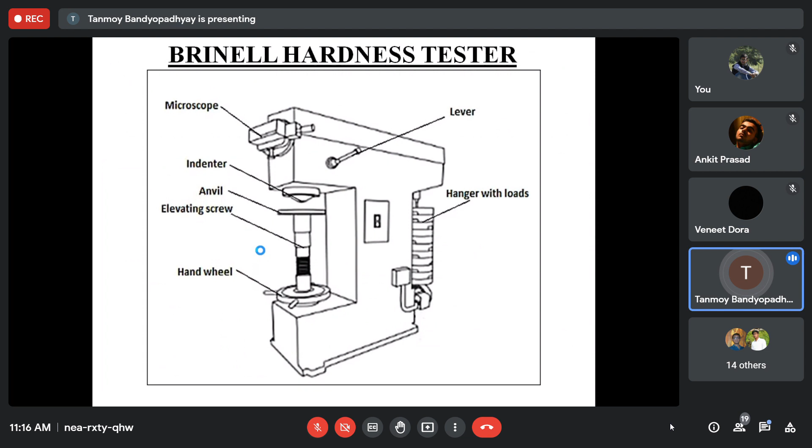এইখানে দেখো, সো এই যে ডেপথ অফ পেনিট্রেশন, এই ডেপথ অফ পেনিট্রেশনটা আমাকে বলা হয়নি, হোয়াট শুড বি দ্য ডেপথ অফ পেনিট্রেশন এন্ড অল, দ্যাট ওয়াজ নট গিভেন টু আস। সো ইন কেস অফ রকওয়েল হার্ডনেস, what we will be measuring is the depth of penetration, P.

So in case of Brinell hardness, we measured the diameter of indentation, and in case of Rockwell hardness, we will be measuring the depth of indentation. So in this case, the permanent depth of indentation is measured. So I had discussed in the last class that in case of hardness, the definition of hardness itself states that it is the plastic deformation, the resistance to plastic deformation. So only the permanent deformation or the plastic deformation that gets formed inside the material, that we have to measure.

So what is the suitability for Rockwell hardness testing? It's most accurate than other methods. Whatever are the methods of hardness testing like Brinell, Rockwell, Vickers, shore hardness, many hardness tests are there. So amongst all of them, this one is the most accurate and most widely used. It is very easy to perform, used for most metals except large surface variations. So it is useful for most of the metals that are available in engineering applications. It's used for relatively softer materials compared to the Brinell hardness test, which is used for harder materials.

So Brinell hardness test is mostly used for harder materials, or which are having like coarse shapes actually, coarse grains. So in that case, we'll be using the Brinell hardness test, and for comparatively softer materials having finer grain sizes, we will be using the Rockwell hardness testing.

So in Brinell hardness, we applied a single load actually, but in case of Rockwell hardness, we will be applying two loads. So initially we have to apply a minor load or a preload of 10 kg force on the test surface using a diamond or a ball indenter. So application of this minor load was not required during the case of Brinell hardness testing. Why? Because in case of Brinell hardness testing, we never measured the depth of indentation. So whenever you are actually measuring...

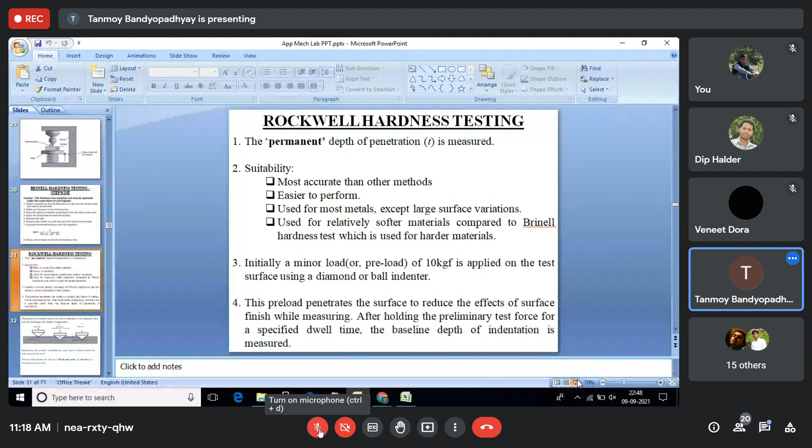So whenever we are measuring the depth of indentation on the surface, we have to consider one datum line. When measuring a depth or a height, you have to measure starting from some datum line.

So that datum line has to be considered. In order to create a datum line, we apply a minor load of 10 kgf, or a preload, on the surface of the specimen using a diamond or ball indenter. This preload penetrates the surface to reduce the effects of surface finish while measuring. After holding the preliminary test force for a specified dwell time, the baseline depth of indentation is measured.

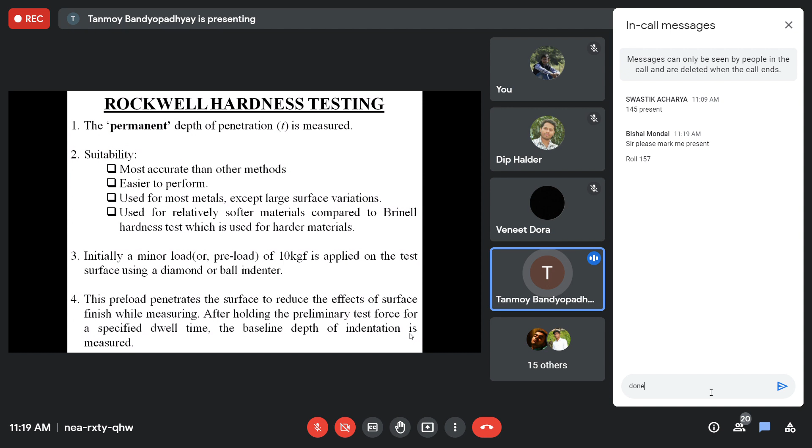So what we do is initially apply a minor load of a certain 10 kgf on the specimen so that it indents a certain height. This is the initial height. Let's call this indentation depth delta. After indenting by a depth of delta, I have to keep the load there for a certain amount of time.

Why? Because this delta will have two parts, an elastic part and a plastic part. I have to allow for a certain dwell time so that the elastic part recovers by itself and only the plastic part remains. Whatever plastic part remains, that depth forms the zero reference line from which I can continue the depth measurements on the surface.

Why am I doing this? Because any surface having rust and imperfections like surface coatings can undergo some surface preparation, but still, we apply a minor load of about 10 kgf, and whatever depth the indenter indents on the surface, we consider that as the zero reference line from which to start measurement.

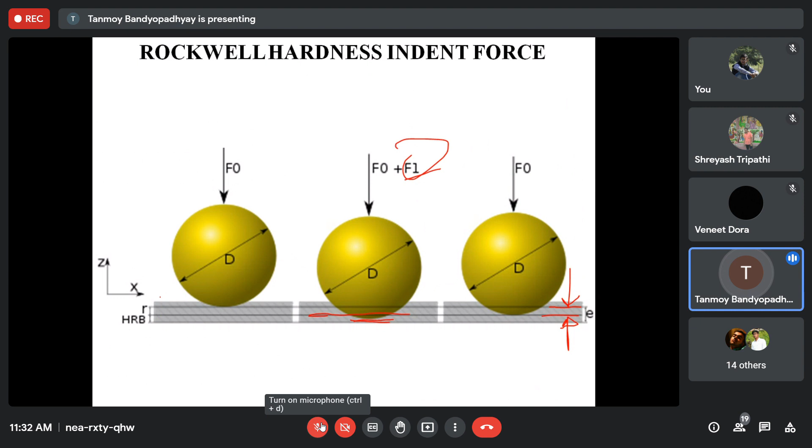What is the value of the major load? What is the value of the minor load? What is the purpose of applying the minor load? The minor load actually forms the datum surface, the initial datum surface, because in any case we cannot take the surface of the specimen as the datum surface, since there can be certain irregularities, there can be many things as I discussed. So what are the purposes of the minor load?

All these things are just important to understand - why we are measuring, what we are measuring, and how we are measuring.

So the last part is the testing precautions. Testing precautions are very important actually. It might look very easy or trivial, but actually testing precautions are very much important from the viewpoint of hardness measurements. This is applicable to both RHN as well as BHN.

Whenever you are measuring, in order to get a reliable value of the Rockwell hardness number, the thickness of the test piece should be at least 10 times the depth of indentation. Whenever you are indenting a surface, if the specimen itself is not rigid enough, like if it's a very thin specimen, then when you apply the load using the indenter, the specimen will start to bend, so the measurements won't be accurate or reliable.

So whatever is the thickness of the test piece that you are measuring, the thickness of the test piece should at least be 10 times the depth of indentation. So if this is the thickness of the test piece, whatever depth of indentation you are doing should be 1/10 of that. You cannot indent it up to, say, 50% of the surface and all.

So the readings should be taken from a flat perpendicular surface. Since you are measuring a depth, all the surfaces should be perpendicular. The load you are applying should be in entire perpendicularity with the top surface of the specimen, or with the axis of the specimen. The axis of the specimen should be in perpendicularity with the direction of application of the load. Unless that is the case, the deflection you are getting, the depth of indentation you are measuring, won't be a true vertical displacement.

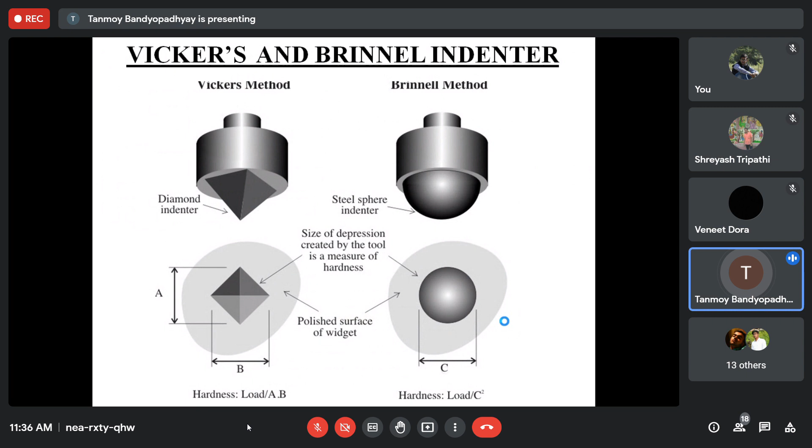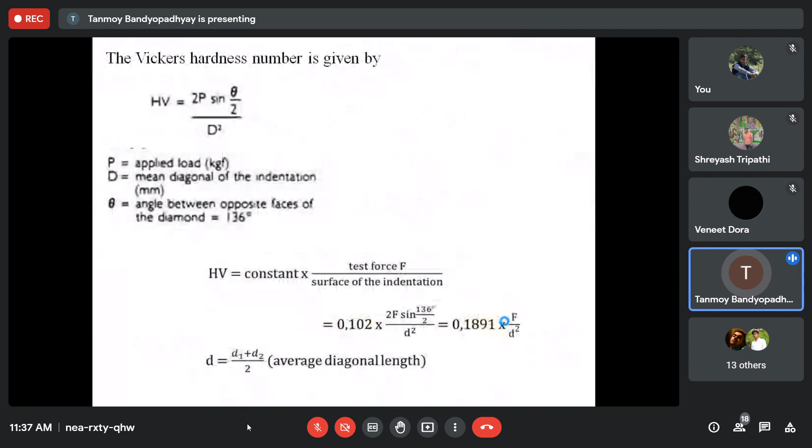What is the difference between a Brinell hardness test and a Rockwell hardness test? This is a very important point: number one, in Brinell hardness you are measuring the diameter, while in Rockwell hardness you are measuring the depth. Number two, Brinell hardness is applicable for harder materials and coarse grains, while Rockwell hardness is applicable for softer materials and finer grains.

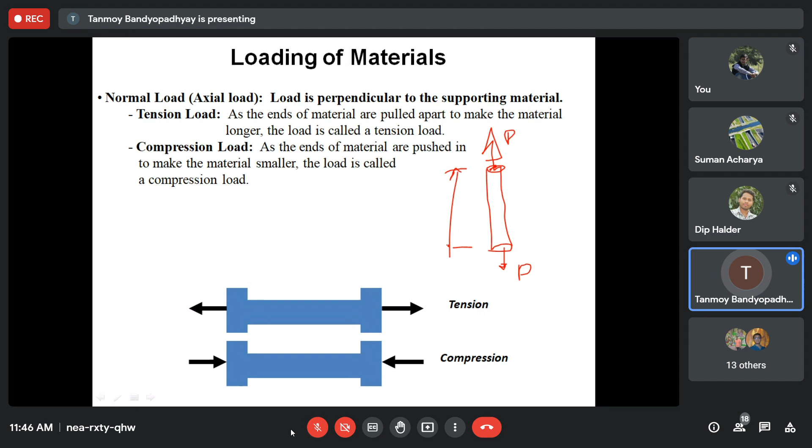Whenever we are doing tensile testing, the specimens are mostly cylindrical in shape. At both ends, we fix them to two jaws on a UTM machine, a universal testing machine, and then we pull the specimen using two equal and opposite loads. On the top part you are applying a load of P, and on the bottom part the same load of capital P. They must be equal, both on the top and bottom.

So let's see what happens. We are doing the tensile testing on a mild steel specimen. The shape of the specimen is sort of a cylindrical bar. A UTM is a machine, known as a universal testing machine.

Why is it called universal? Because many sort of experiments can be conducted on the universal testing machine. If you see in the lab, there are three basic tests. The first one is tensile testing, number two is compressive testing. Compressive testing is very useful for civil application tests.

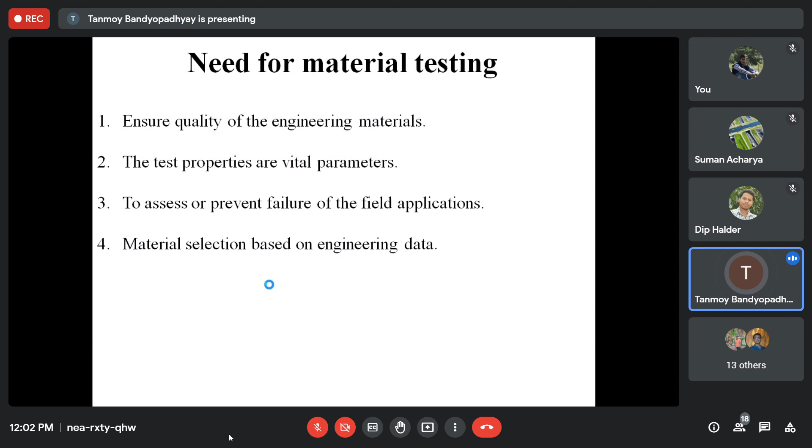আচ্ছা, এবার টেস্টিং যেটা হয়, so testing are of two types. One is known as destructive testing and another one is known as non-destructive testing.

So what is the destructive testing? Destructive testing মানে হচ্ছে suppose tensile testing. In tensile testing, we are loading the specimen, plotting the load deflection diagram, and at the end stage the specimen actually ruptures or breaks. Do you feel that the specimen after its testing is applicable or suitable for the engineering application? No, right, the specimen is ruptured.

It's a destructive case, so the specimen has been destroyed. It is not available for future application. So it's a destructive test, this tensile testing. So what we do is we take a specimen.

তো এখানে কি হয়, repeatability হতে পারে। Suppose I take 100 specimens and I test only one specimen. The properties that I get from that one specimen, say Young's modulus or shear modulus, all the other 100 specimens will be having properties exactly similar, if not exactly similar, within a certain tolerance limit. So if I test only one specimen, I can guarantee that all specimens in that lot or batch conform to the same standards. That is known as tolerance or standardization of the specimens.

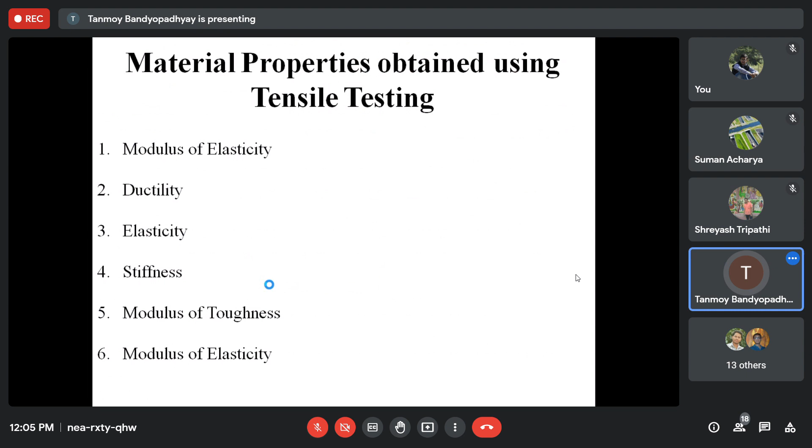আচ্ছা, what is a tensile tester? It is a tensile testing machine that we discussed. It's a machine which applies the tensile force to the specimen and measures that force and also the elongation. So in a tensile test, we have the arrangement so that a controlled and measured tensile force can be applied on the specimen, and the specimen also has arrangement so that force and elongation can be measured.

So after applying the force, you go on increasing the load, and in each step you measure the force and the deflection. In order to measure the deflection, you will have extensometers fitted on the specimen. Since the extensometer is fitted on the specimen itself, as the specimen elongates, the extensometer will also elongate by that amount. বুঝতে পেরেছো? এক্সটেন্সোমিটারের different principle আছে, but its job is that it is fitted to the specimen and measures the deflection that occurs in the specimen.

So finally we are measuring the force and the deflection on the specimen, and in most UTM machines you have a plotter, a pen and paper arrangement where we can directly get the F-delta curve. In modern machines, they have a computer interface. Whenever you are loading a specimen, the force and deflection are directly measured, the data passes on to the computer, and in the computer itself you can measure the load deflection diagram.

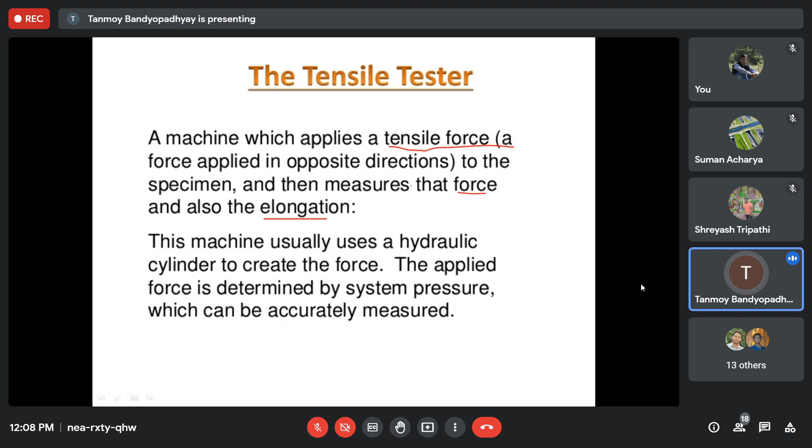The force we are applying, we are applying using a hydraulic arrangement. There is a hydraulic cylinder based on which the force is being applied. The applied force is determined by the system pressure, which is accurately measured. So this is a hydraulic UTM actually.

I don't know if you have seen UTM testing, like tensile testing and all. So this is the arrangement that we have. You can see that there are two jaws. This is the upper jaw and this is the lower jaw. In this part, the specimen will be fixed.

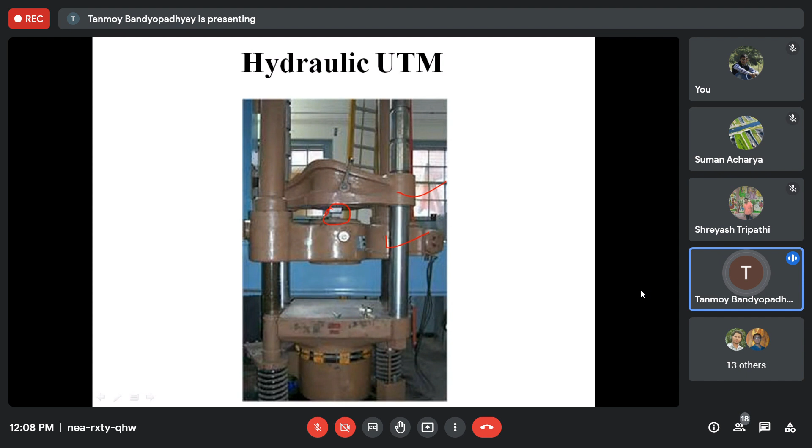As I mentioned, UTM operation can either be mechanical or hydraulic. Mechanical means it can be operated using a motor or a gear and all those things, and hydraulic means it's being operated using a fluid pressure. Either there is a single acting or a double acting piston to move the crosshead upward or downward to apply the load.

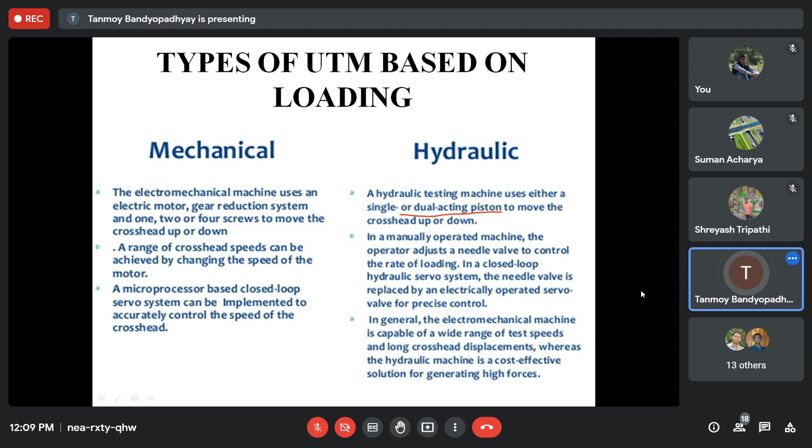This is the cup and cone fracture which I discussed, where the specimen is gripped in two jaws. So you have two jaws in the UTM machine. The specimen is fitted between the jaws and the load is applied on the specimen. One is a fixed jaw and another one is a movable jaw - both jaws don't move, one is fixed and the other is movable.

Whenever the load is applied, there is a deformation on the specimen. In order to measure the deflection on the specimen, as I had discussed, we use two extensometers - a left extensometer and a right extensometer. On the left side of the specimen we fix an extensometer, and on the right side we fix another extensometer. We get data on deflection or extension from both extensometers. We take the average of the left and right extensometer values and then get the actual deformation in the specimen, delta.

So up to this point I had discussed that whenever you go on increasing the load, a time will come when the specimen will neck. If you go on increasing the load, a time will come when visible bubbles or visible deformations will occur in the specimen. Then the bubbles will coalesce among themselves, and a time will come when the specimen will fracture completely, using a cup and cone fracture sort of thing.

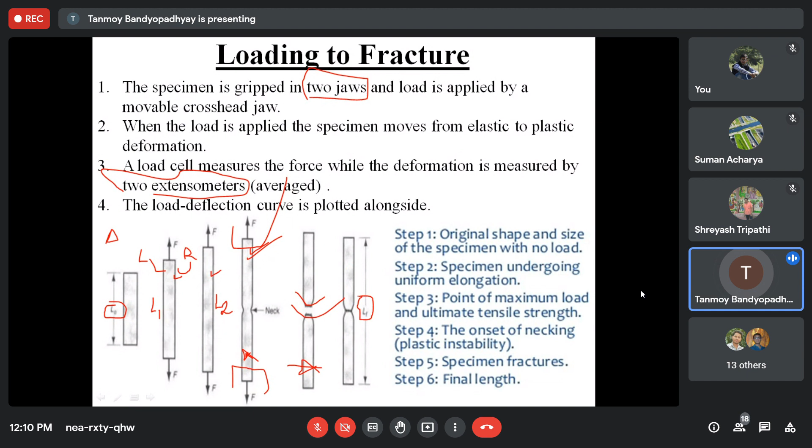So finally what we do is we measure the final length. We join the two pieces of the specimen together and measure the final length LF. From there we can calculate the strain epsilon as LF minus L0 divided by L0.

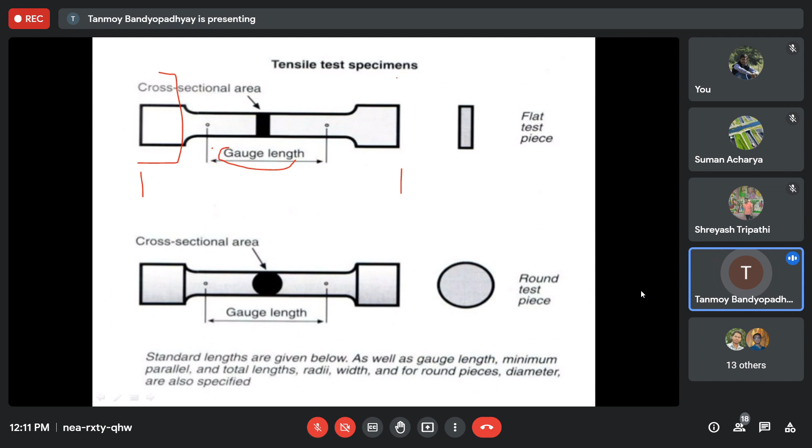This is about the flat test piece and round test piece. We have to take one gauge length. What is the gauge length? Gauge length is the length on which the actual measurement is being done. We don't take the total length into account, because two parts are for fitting in the jaws of the machine. That part actually goes inside the jaws, so on this gauge length part all the calculations are done.

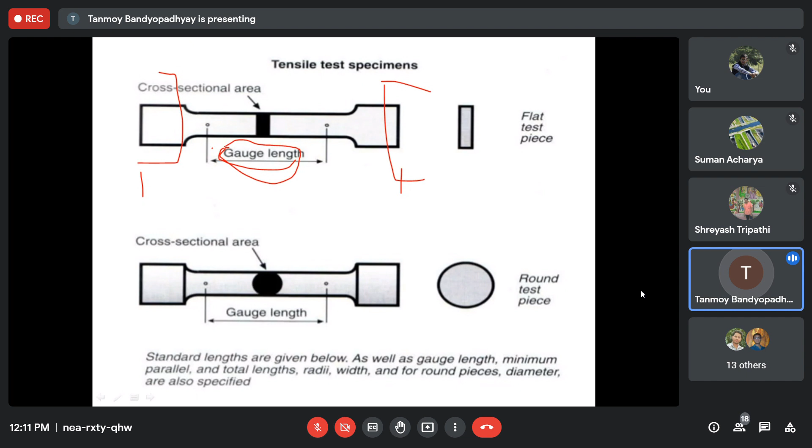And the cross section of the specimens, either they can be round or a cylindrical specimen, or they can be a flat test piece. I will show you the test pieces next day.

So in the load deflection diagram, at each step we measure the load and we measure the deflection. Either we can divide the load by the original cross sectional area, or we can divide the deflection by the original length, so that we get the stress strain diagram.

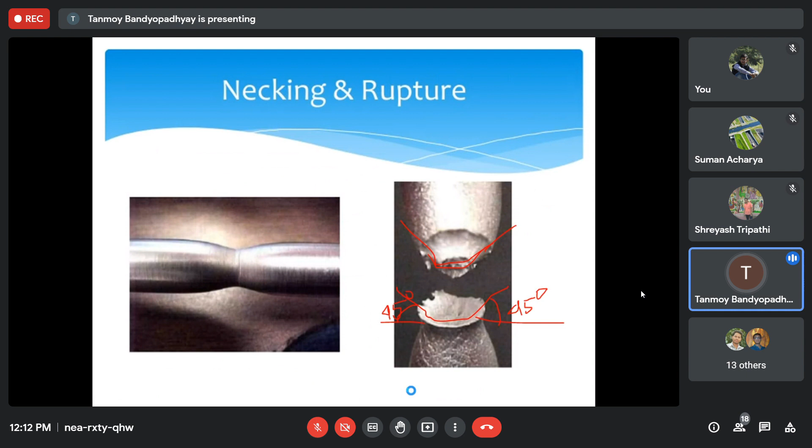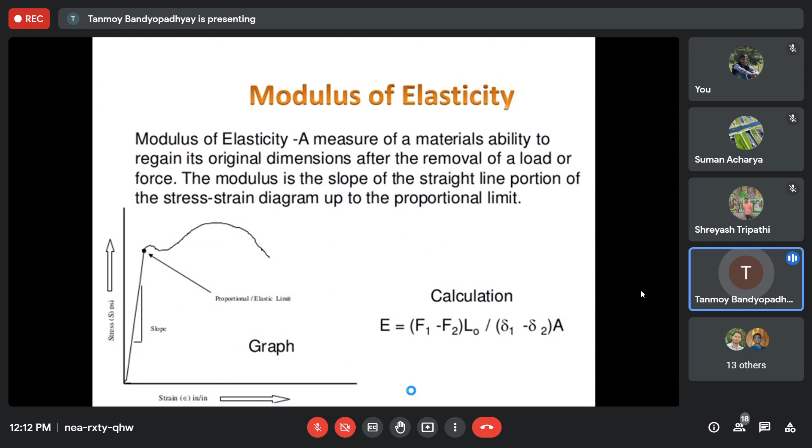This is a stress strain diagram of a specimen, or a load deflection diagram of the specimen. Whatever is the nature of the force deflection diagram, the same nature of curve you will get if you plot the stress strain diagram based on the initial cross-sectional area and the initial length. Since the initial cross-sectional area A0 and the initial gauge length L0 were fixed, the nature of the stress strain diagram and the load deflection diagram will be the same.

So initially there are some points on the graph. There is something called the limit of proportionality or proportional limit. What is this proportional limit? I am drawing the graph again as I feel suitable, while I keep on explaining the thing.

Initially there is an elastic zone. Whenever you are loading the specimen, this is the force direction F and this is delta. As you go on increasing the load, there is a deflection in the specimen. Up to this elastic limit, the initial point I am calling point A, which refers to the proportional limit.

So proportional limit means F is proportional to delta, the force varies directly as the deflection delta. So whatever force you are applying, F is equal to K times delta, like a linear spring.

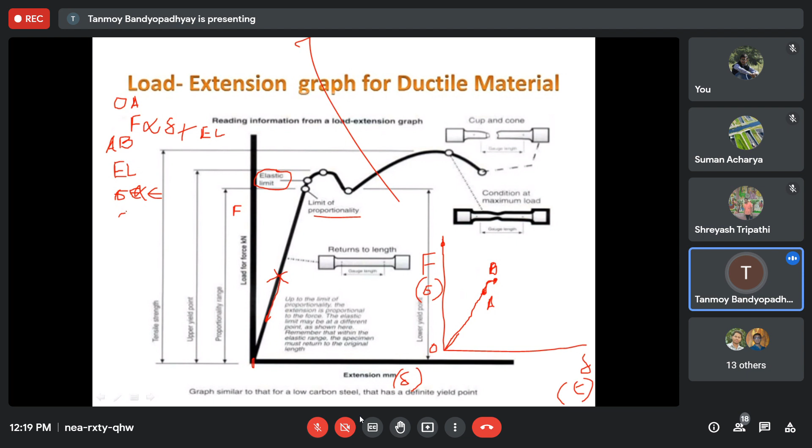So this stress is actually proportional to strain. So stress is proportional to strain, so stress by strain must be a constant. So if I do stress by strain, that is the constant actually. So this constant we call it as the Young's modulus or the modulus of elasticity. This stress by strain within the elastic limit is known as the Young's modulus or the modulus of elasticity, such that sigma is equal to E epsilon. So this E is known as the Young's modulus of the material.

So for mild steel, the value of the Young's modulus is something like 210 gigapascal. So sigma is equal to E epsilon. So stress is proportional to strain within the elastic limit of the specimen. So this formula is actually known as Hooke's law. Hooke's law states that within the elastic limit, stress is proportional to strain, and the constant of proportionality is known as Young's modulus of the specimen.

So now once we cross the point B, we come to a point which is known as the upper yield point. Yield point means the material has started to deform. So whenever there is a plastic deformation in the specimen, we call it a yield point. So there is an upper yield point, then there is a lower yield point. The specimen takes a certain drop, so there is a lower yield point of the specimen. Then the material actually strain hardens.

Strain hardens, and there is a sudden increase in the force. And then you are having an ultimate stress, and after that there is a breaking stress. There is a point here which is known as the breaking stress. So this is point C, this is point D, this one is point E, and this one is known as F. F is the breaking point. Write this down.

So you can see, up to this point you are applying a force and there is an extension, there is a proportionate extension. But after this, this is the elastic limit.

Once you cross the elastic limit, you can see the curve looks like this, with a lower yield point, then an ultimate load and a breaking load. The force hasn't increased too much beyond the elastic limit, but you get a much higher amount of deformation in the specimen. So even a small amount of force causes a very large deformation once the material becomes plastic. That actually defines plasticity - the material is not at all elastic anymore, and a very small load causes a very high amount of deformation in the specimen.

That is why we do forging, you have done forging lab. In forging, the material was actually in the plastic zone. You can give a high amount of deformation on the specimen at high temperature because at high temperature the specimen is in the plastic zone. In the plastic zone, even applying a very low amount of force causes a very high amount of deformation. So all the metal working operations you have done - forging, reducing diameter, drawing, upsetting, whatever you are doing - are actually plastic deformation of the specimen. In the plastic zone you apply a very small load but cause a very high deformation, and that defines plasticity.

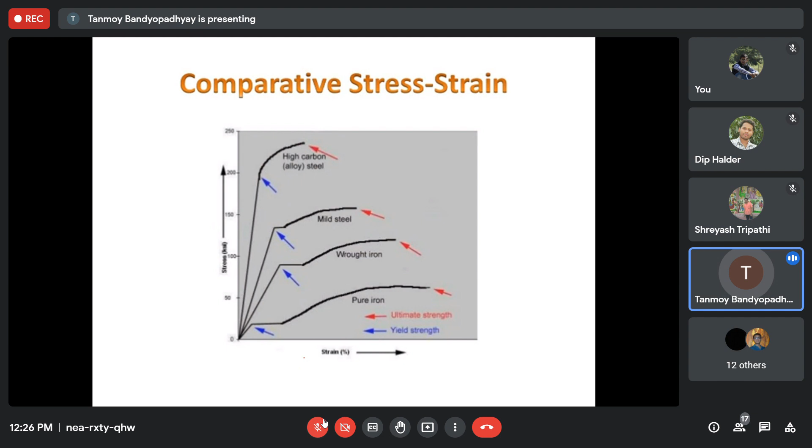You can see the blue lines represent the lower yield strength of this specimen. Some materials have lower yield strength, some have higher yield strength, and so on. So for different materials we can plot different stress strain diagrams which have very wide engineering applications.

Coming to brittle materials lastly - brittle materials like glass, stone, concrete and such things don't undergo any amount of plastic deformation. So as soon as the elastic limit is crossed, there is nothing - there is failure of the specimen.

So the plastic part that was there in a mild steel specimen or a ductile specimen is not at all there in brittle materials. Whenever you encounter a brittle material, stress is proportional to strain only in the elastic part - there is no plastic deformation part of the specimen. Any brittle material cannot undergo any amount of plastic deformation. Necking won't happen - there is no scope for that reduction in diameter.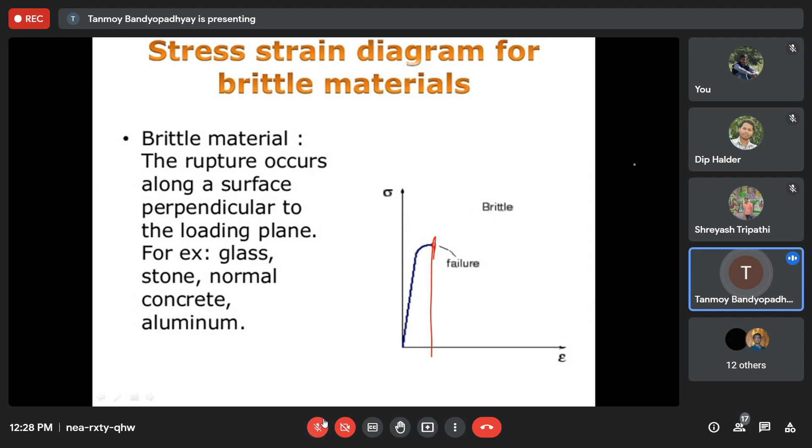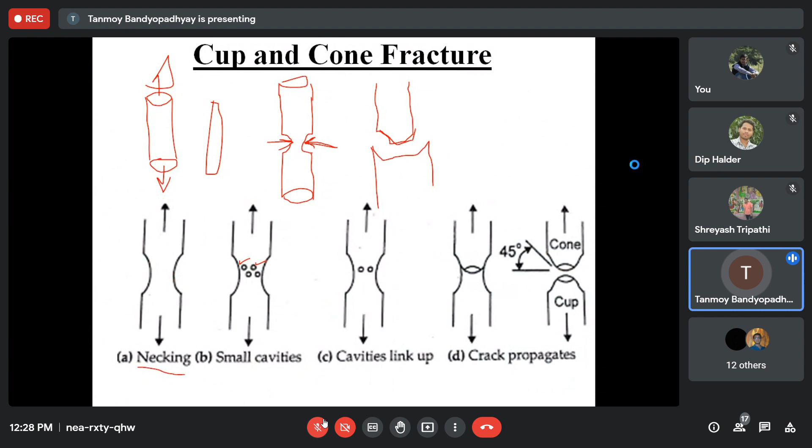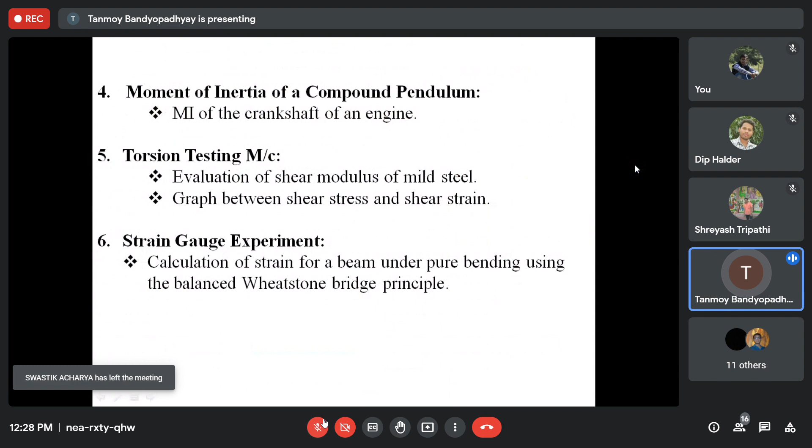তো এইটাই আমি একটু ডিসকাস করলাম। নেক্সট ডে আমি আরেকটা ফিগার দেখে একটু বলে দেবো, বা আদার বই থেকে একটুখানি বলে দেবো। এখানে এটাই আমার বলার ছিল, বেসিক্স গুলো এইটাই আছে। নেক্সট ডে আমি আরেকটু থিওরি বলবো, আর ভিডিওগ্রাফি থেকে আমরা ডিসকাস করবো। আমাদের দুটো এক্সপেরিমেন্ট হলো, নেক্সট ডে আমরা ভিডিওগ্রাফিতে এক্সপেরিমেন্টটা নিয়ে আরেকটু ডিসকাস করবো।

ঠিক আছে? সো আজকে এটুকুই থাক।

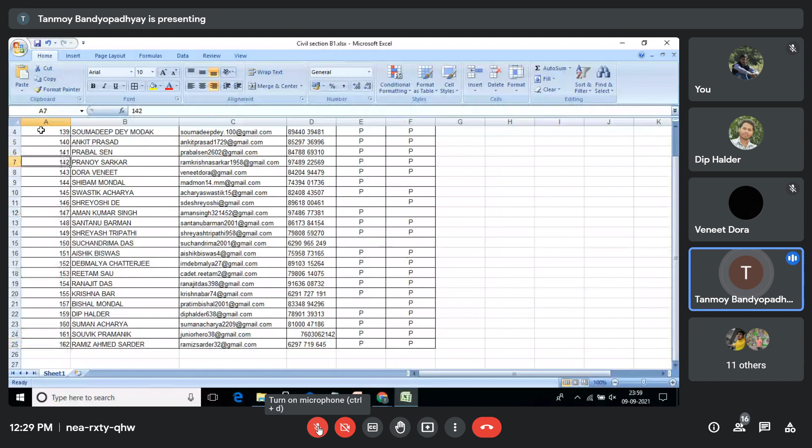আচ্ছা, ভিডিওগ্রাফিটা তোমরা সবাই দেখছো তো? হ্যাঁ স্যার, এভরিবডি হ্যাজ গট দ্য লিংক? Yes sir। অ্যাটেন্ডেন্স দেওয়ার সময় অনেকজন ছিল, কতজন? ১৩ জনই ছিল। অ্যাটেন্ডেন্স দেওয়ার সময় অনেকজন থাকে, ক্লাস শেষ হওয়ার পরে দেখি কেউই থাকে না, কি ব্যাপার? সিরিয়াল নাম্বার করলে মোটামুটি ২০ জন তো হওয়া উচিত ছিল। যাই হোক, অনেকে বোধহয় চলে গেছে।

ইন্টারেস্ট না হলে করবে না, সেটা কিছু না। আচ্ছা, নেক্সট ডে তোমরা কি একটু প্রেজেন্ট করতে পারবে কেউ, ভিডিওগ্রাফিটা? নাকি আমি তাহলে ডাউনলোড করে নিয়ে প্রেজেন্ট করব, কোনটা সুবিধা হয়? ঠিক আছে, তোমরা করলেও হয়, নাহলে আমি আজকে দেখছি, আমি ডাউনলোড করে নেবো সবকটা। আমি ডাউনলোড করলে আমি কন্ট্রোল করতে পারবো, সবকটা পার্ট তো এসেনশিয়াল না, যেই জায়গাগুলোতে তোমাদের ডাউট আছে বা যেই জায়গাগুলো মোস্টলি বলার দরকার, সেই জায়গাটাতে আমরা একটু বেশি কনসেন্ট্রেট করব।

The parts that are mostly important, সেই জায়গাগুলো আমি ভিডিওগ্রাফি গুলো you have seen, like it's like কতক্ষণের? 1 hour and all I think. হ্যাঁ, সো এটা চালিয়ে দিলে তো 2 hours এমনি চলে যাবে। So আমরা জাস্ট ইম্পর্টেন্ট পার্টস and mostly the parts where you find difficulty in, সেই জায়গাগুলো আমরা একটু ডিসকাস করব।

আর যেহেতু তোমরা স্ট্রেংথ অফ মেটেরিয়ালস এখনো পড়োনি আই থিঙ্ক, তাই তো? হ্যাঁ হ্যাঁ। সো আমি একটু আজকেই বলে দিতে পারি, বাট অ্যাকচুয়ালি সমস্যাটা হচ্ছে সবাই তো আমি দেখছি যে অনেকে লিভ করে গেছে অ্যাকচুয়ালি।

ঠিক আছে, নেক্সট ডে আমি বিয়ার জনস্টনের বইটা থেকে আরেকটুখানি ডিটেল করে বলে দেবো এই জিনিসটা, মানে এই যে কাপ অ্যান্ড কোন ফ্র্যাকচার এন্ড অল দোজ থিংস, যেগুলো আমি এখন ডিসকাস করলাম। তোমাদের যদি মনে হয় যে একটু ইয়ে করবে, তোমরাও একটু ওই বইটা দেখতে পারো, যদি ফিল করো আমি পাঠিয়ে দেবো। ইউ ক্যান অলসো হ্যাভ এ লুক অ্যাট দি থিংস, যে কিভাবে স্ট্রেস স্ট্রেন ডায়াগ্রাম কাকে বলে, হোয়াট ইজ হুকস ল এন্ড অল দোজ থিংস।

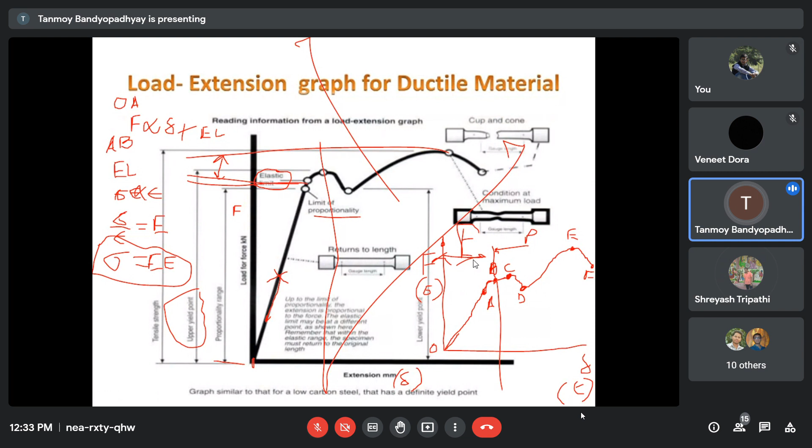This part is the upper yield point. Once it reaches the upper yield point, there is a certain amount of strain hardening occurring in the material. When you try to deform any material, it has certain internal resistance, so there is a certain drop, and then suddenly it increases its strength. There is a sudden increase in the strength of the material. It is able to again bear some load.

If you see this part, call it C and call it D. For the part C to D, the material shows a reduction in load actually dropped, but still there was an extension in the specimen. So there is a reduction in strength, but after point D there is again a sudden increase in the load, so it is again able to bear this amount of load. There is a strain hardening part, the material is able to strain harden and bear certain amount of more load.

The point where necking or the plastic part started, we call it point C, the upper yield point. Then it drops again, so it has started to deform plastically and is losing strength. You can see the curve is drooping from point C to D. The curve has actually drooped. There is a decrease in load but increase in extension. You are not applying any load, but the material still has some extension.

You can see here - low carbon steel, it's a mild steel, a ductile material. You can see the material dropped, then there is again a strain hardening part, a huge strain hardening part. So that is why you have an upper yield point where the material started to lose strength and the curve drooped - there is lowering of force but deformation occurring. There is a point up to which it will droop, and after that it will go up again due to the huge strain hardening part. The point from where strain hardening starts is known as the lower yield point, and the point before that is the upper yield point.